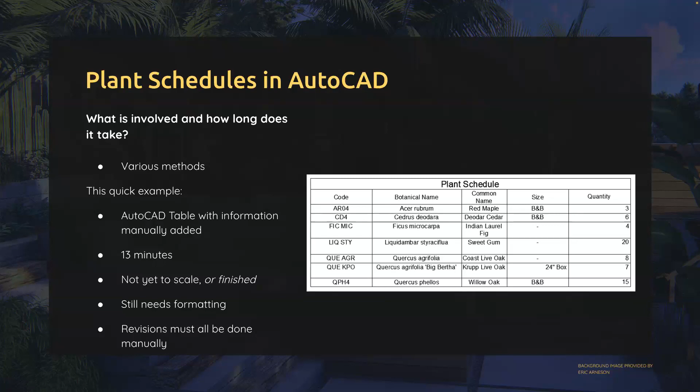So when working with LandFX, the schedule is just a few clicks away. It takes almost no time at all. This one here was using the same planting plan as the one I generated with AutoCAD, and it took about 5 seconds to generate. Now that 5 seconds includes the time that my hand left my watch when I set the timer to the mouse, the 3 clicks it took to place the schedule, and then my hand moving back from the mouse to my watch to stop the timer. So it probably took less time than that.

The benefits to this, though, besides the incredible time saving you get from generating the schedule, I can quickly reformat the style. With schedule options, I can change it very quickly. I can add or omit information with a few clicks. If I do make changes to my planting plan, which, as we know, changes are made very commonly, to update that, all you got to do is regenerate the schedule, which is also pretty instantaneous, and it's accurate. Super important that the schedule quantities and the information within it is going to align perfectly with what you want it to show.

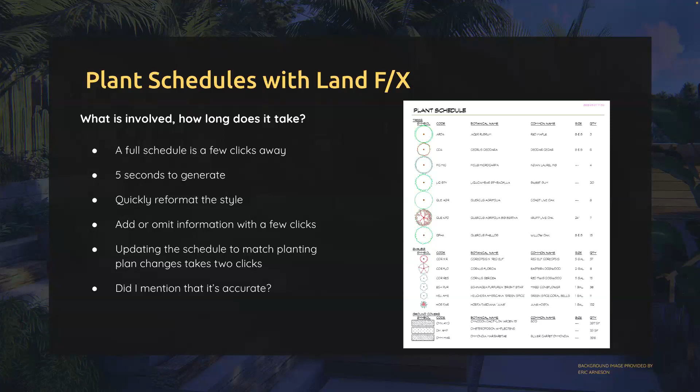So this slide isn't necessary, but is there a noticeable difference? And yeah, even if I was moving very fast and creating a very simple schedule in AutoCAD, it would have taken me at least 20 minutes. Now I know there's other methods to do this. Some people use Excel and paste the cells into AutoCAD from Excel, or you can do a lot of front end work where you create blocks with attributes that will allow CAD to kind of automatically add up certain items. But either way, it's a lot of work and time versus what comes with LandFX out of the box, which is about a 5-second schedule, no matter how complex your planting plan is.

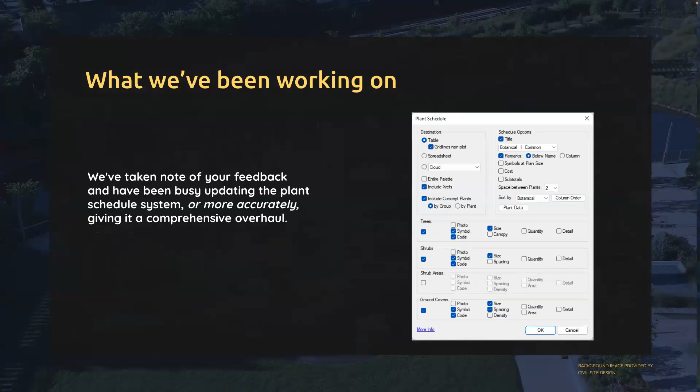So we have been taking note of all of your feedback over the years, and we've been busy updating the plant schedule system, or more accurately, giving it a comprehensive overhaul.

Some new features that I hope you're excited about: first off, we have a cleaner, more intuitive dialog box. Everybody loves dialog boxes, right?

Here's a really neat new feature: you now have the ability to reorder columns. If you click on this column order button, which I will show in a little bit, it'll bring you to this box where you can select columns and reorder them using the little arrows. And you get a nice little preview of what those columns will look like in their order.

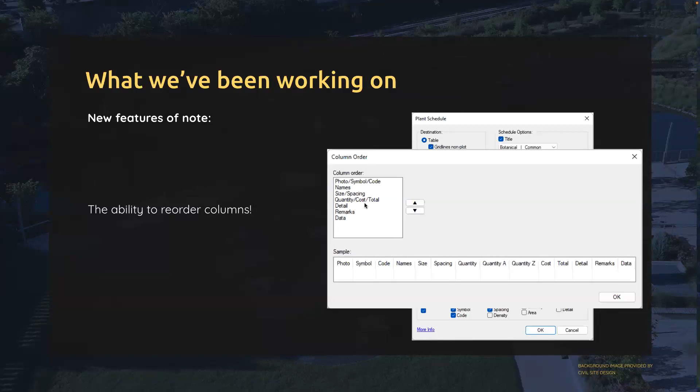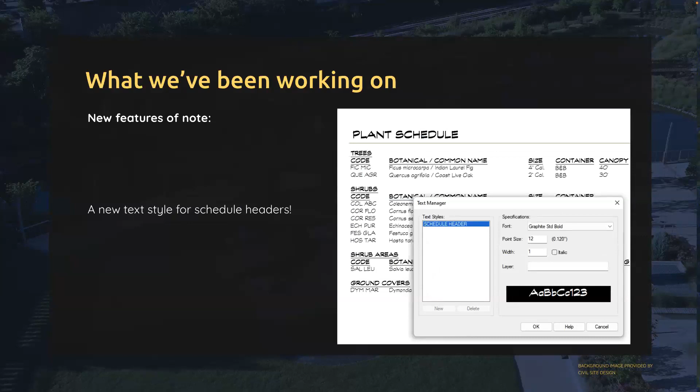We've also added a new text style for schedule headers — schedule headers being this text here. Previously, it just took on the schedule text style, and many of you wanted a separate text style for that, whether you wanted to make the text bold or a different font or what have you. So we've added that ability.

You can now include the canopy size for trees. Before, if you wanted to do that, you had to set up a custom user field. We got a lot of requests for including the canopy, which basically shows the tree size at its mature width in its own column.

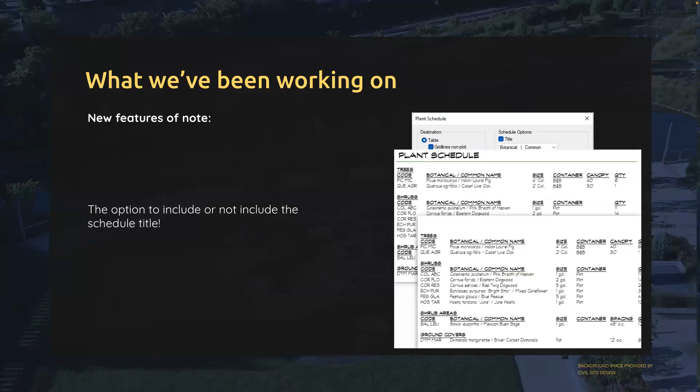We've also added the option to include or not include the schedule title. This can be useful if you're running different schedules by groups or maybe different work areas. You can run a schedule with the title up top and then run smaller schedules and place them right under it, and that title won't be there for those other schedules.

The plant group is now on a separate line from the header. Before, the tree group would have basically sat on top of where the code should have been. Now trees or shrubs or your plant groups have been moved up, so you now have a clearer schedule here because of that.

And here's a big one: whether you're running a schedule within a table that shows the cells, or what used to be called the drawing option, where you place a schedule without these cells, no matter how you place your schedule, they always go in as AutoCAD tables, which allows you to more easily adjust the widths of columns and the contents within, and also allows for better alignment of symbols.

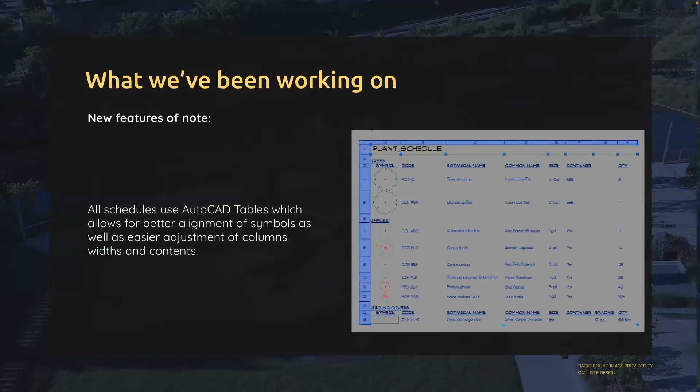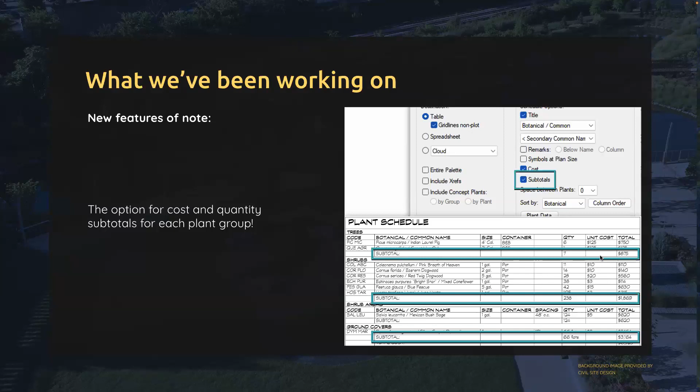Our previous plant schedule options had an option for space between plants, but it was basically a checkbox. Now you can adjust that space between plants between 1 and 5 spaces.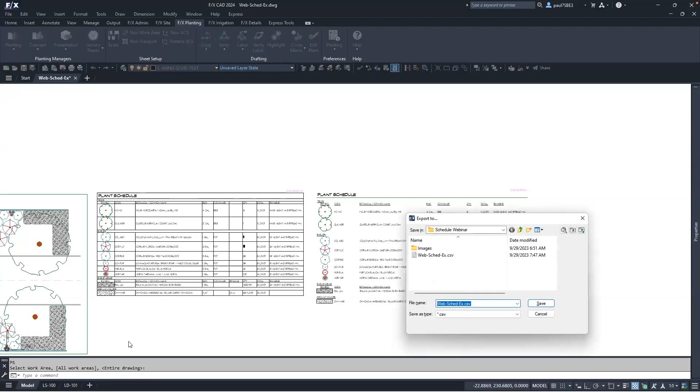I'm just going to save over one I've already created, and I can show you what that looks like. Now I don't have Excel, I have Numbers, but here is that schedule exported out to your spreadsheet.

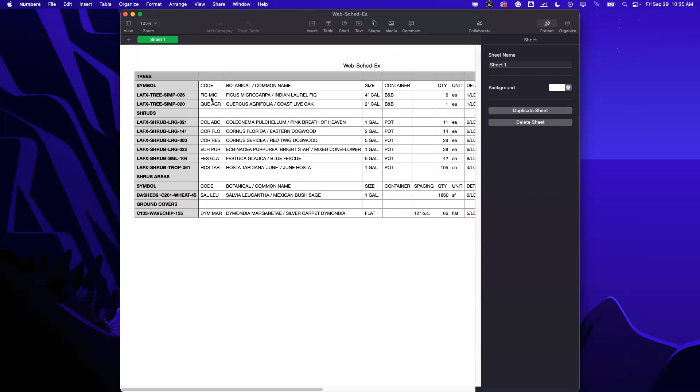Comes in looking really nice. Now I did choose to include symbols in this, so it's showing the name of the block that's used as a symbol, as you can't export blocks and have them show up as symbols in Excel, or the name of the hatch for those hatch areas.

All right, moving down. Whenever you press schedule and there's a schedule in the drawing, the system will know this and will ask you if you want to regenerate the schedule. So if you click yes, you can then click on one of the schedules, or if there's only one schedule available, it'll just update the one that's in there.

Which is great for when you have revisions and you've made changes to your planting plan, added plants, taken plants away, changed the data within the plant, etc. You just go ahead and click that, and the system will update it so that it's accurate.

Moving down in destination, if you are subscribed to Landscape Hub and you use their interface, you can choose this option. Eventually, when we have other partners that do similar items, that list will be here. You click OK, and it's actually going to send that over to your Landscape Hub so you can open that up and view your plant list there.

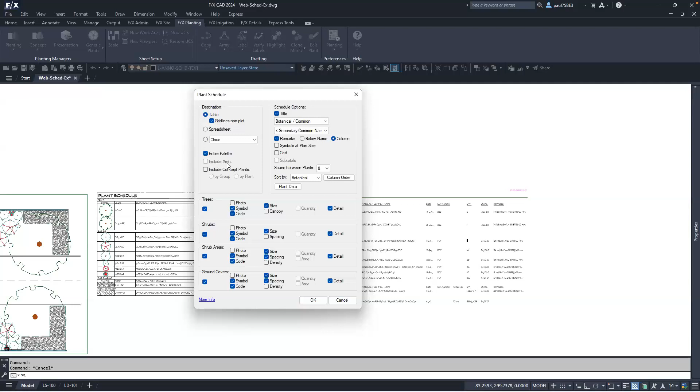But let's stay within CAD. Moving down, we have entire palette. This basically ignores the plants that are in your drawing and instead will give you a comprehensive list of everything that's in your plant manager.

Let's see what that looks like. Over here, this is just everything that I have in my plant manager. Obviously, there's no quantities here because it's ignoring the plants that are in the drawing. Let's clean up our space a little bit and move on.

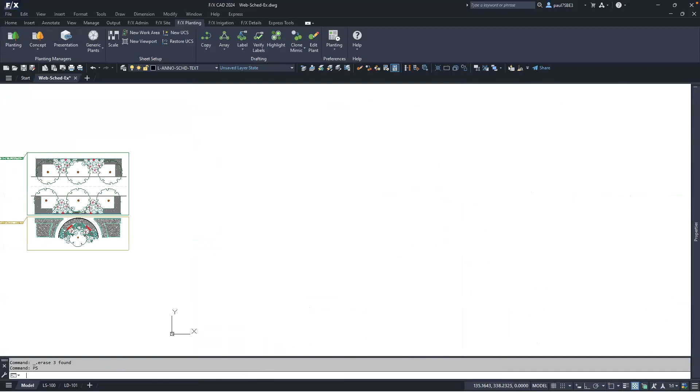So if I uncheck entire palette, it allows me to include Xrefs, as that's kind of superfluous if you're doing everything that's in the plant manager. But if you choose the option to include Xrefs, the system will look one level down into your Xrefs, and if it finds plants in your Xref, it'll include them in the schedule.

So if you follow our recommendation for sheet setup and you attach your planting plan as an Xref into your sheet file, but you want to run schedules in that sheet file, you can do so by choosing this option. I'm not working with an Xref right now because I was trying to keep everything simple, but if I had Xrefs and I chose that, the system would look through it and count plants in that as well.

So including concept plants, if you have concept plants in your drawing, you can click this and it'll actually include it into your main schedule. So I have that one ground cover mix placed. If I check this, it should place that in there.

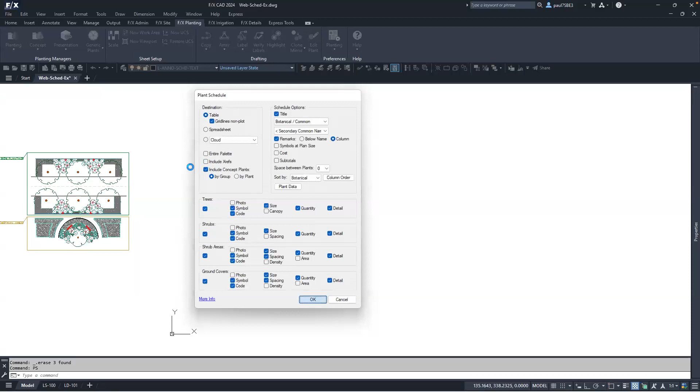Down here, and if you notice, I chose the option to include concept plants by group. So what it does is it actually separates this ground cover mix from the rest of the plants and displays what the mix is in the group with a little indicator here of what the concept group is.

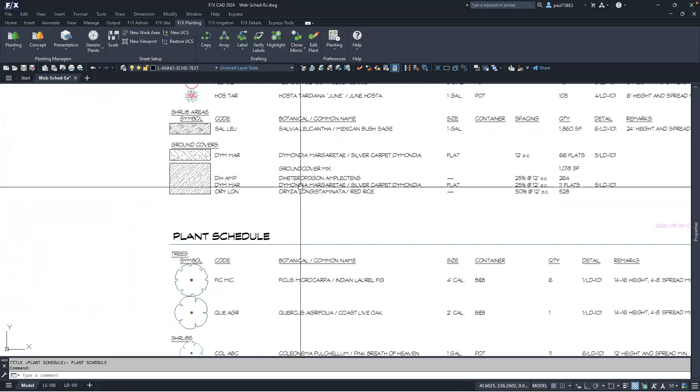If I choose to do it by plant, it's not going to separate it by its group and will actually merge it with the plants that are in your regular plants schedule. You see here, I have a single plant for this Dymondia ground cover, and I also have it included in my ground cover mix. When I run it by plant, it actually combines what's in the mix and what's in my just Dymondia areas, and it combines the quantities, as well as adding in the other plants from the group.

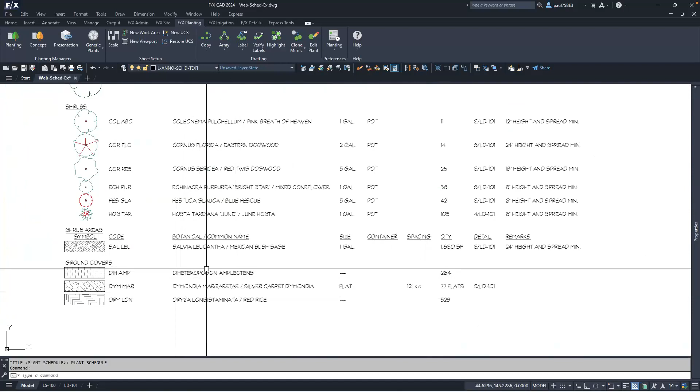So that's concept plants. Let's move over here before we go into plant groups. This title checkbox allows you to place the title on your schedule. So let's say I want to run a schedule for trees, and I want the title because it's going to be at the top. I can place that just like that.

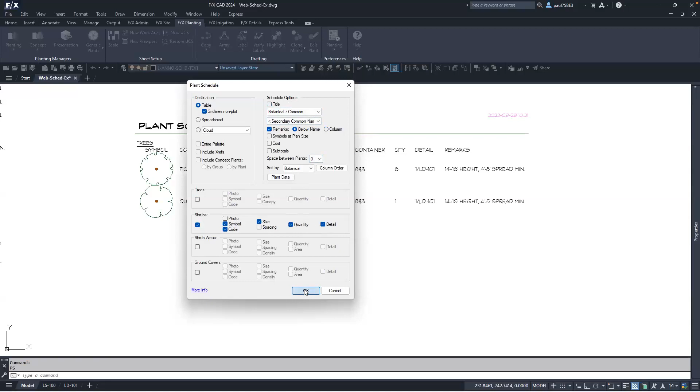And say I want to add shrubs, but for whatever reason I have different options for this, and I don't want the title because I want it to line up. Let's say for shrubs I want remarks below name. So I can click OK and place my shrub schedule. There's no title, so I can easily match it up with the tree schedule, and everything falls under that one title.

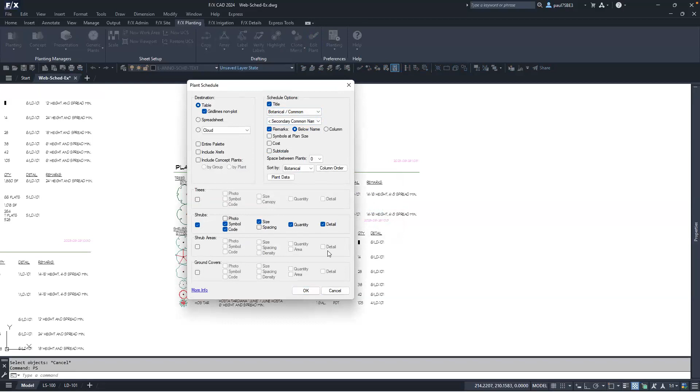So that's what title does. Under title, we have the botanical and common display, or the name display. As it sits, the botanical name and the common name will fall into one column. That's what this slash means, and that's what you see here. If I drop this down, I can switch the order so common comes first and botanical comes second. If I did that for a shrub schedule, it would look like this.

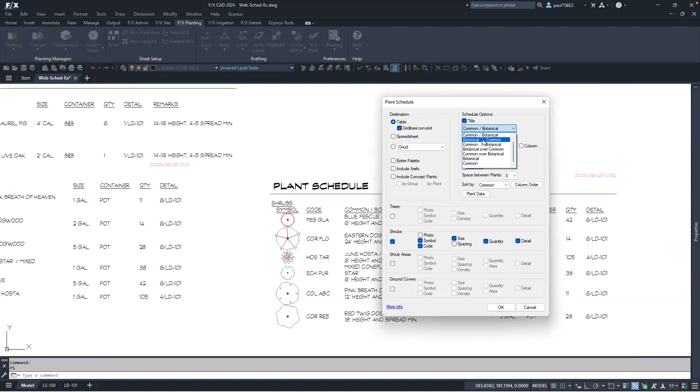Or I can separate the botanical and common name into two separate columns. That's what this straight line means. So if I want botanical in one column and common in another column, I just choose that option and place a schedule. Now we clearly have the botanical name in one column and the common name in another. And the remarks is below the name—that is a separate item.

In addition to separating the columns between botanical and common, you can also do botanical over common, which keeps it in the same column but places the botanical name on top of the common name, like this. You can swap the common and botanical name, or just choose botanical or just choose common. I think you get it.

Moving on, we have secondary common names. So if you're working in a different country and you want to use those common names, you can choose, say, Chinese, and place a schedule and have those characters show up as the common name.

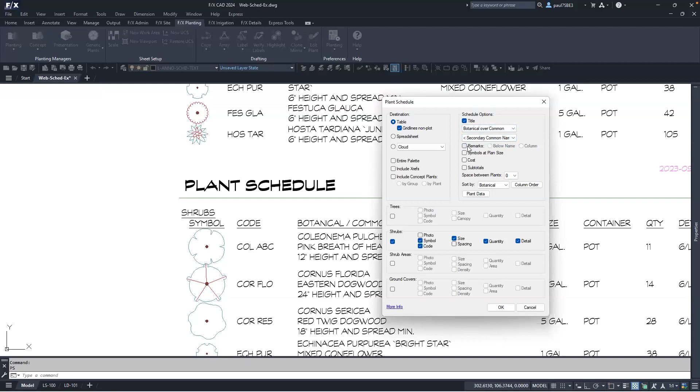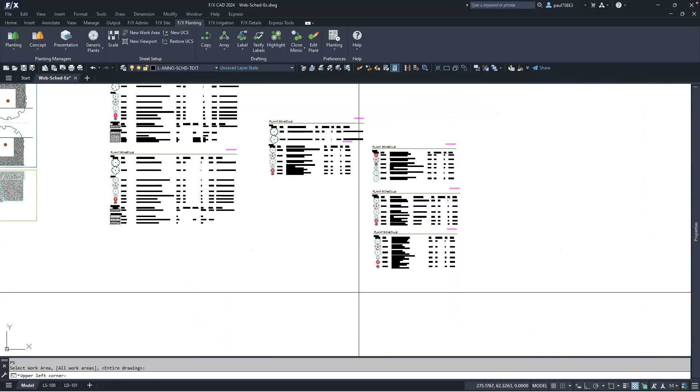The remarks are something you can include or not by checking or unchecking it. If you choose below name, you'll get what we got down here, where the remarks—this 12-inch height and spread minimum note—actually falls underneath the name. But if I choose column, it'll show up in a separate column. Right now it's set to show up at the end, but that is something we can change.

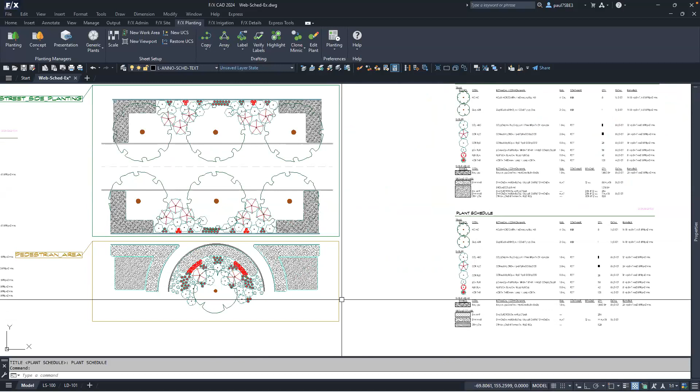Symbols at plan size basically show your plant symbols as they appear in the planting plan. For comparison, let's go over here. So all of these symbols show up at the exact same size as they are in the plan, whereas before they're all more uniform and not perfectly sized to match what is actually in the planting plan.

Below symbols at plan size, we have the cost, which allows you to include the cost of your plants if you've entered a cost value in the plant data, and subtotals, which is new. So I'm just going to check both of those and show you what that looks like. Let's run a schedule without symbols and with grid lines, because I think it looks neater when you're doing cost related items.

So now you have the unit cost—that's what each of these plants costs per unit. This Dymondia is done in flats, but it's still the cost per plant. You've got a total column here, which adds up the quantity times the unit cost, and we also have a subtotal down here at the bottom. The quantity is subtotaled up—this 238 is just all the plants in the shrubs group, and in the total column it's just all the costs of the shrubs right down here. Then you go down to the bottom and it'll add up the total cost of your planting plan.

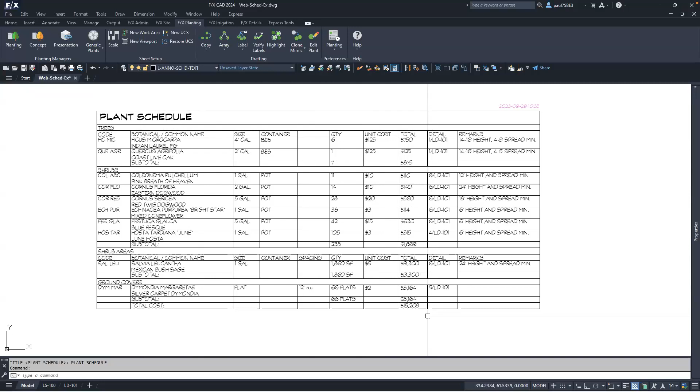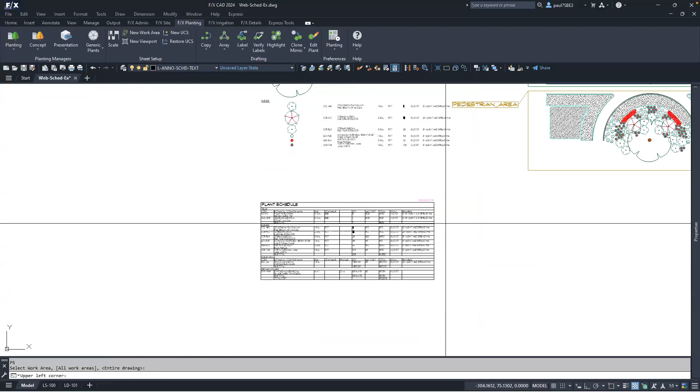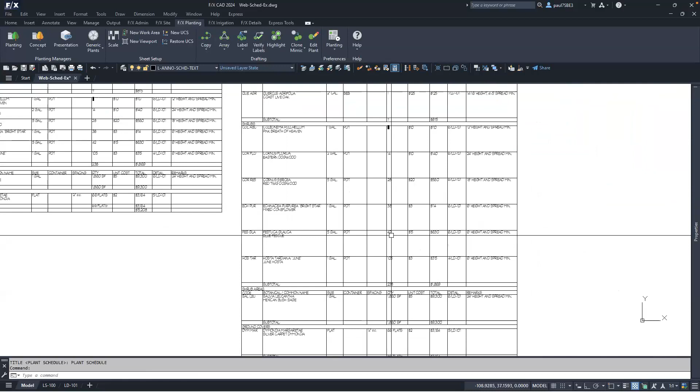Moving on down here, we've got space between plants. Everything I've been running so far is set to 0 space. If we set 1 space, you can see what that looks like—it's basically just adding a space here in the plant name. You can adjust this, so if you want 5 spaces between your plants, you can do so, and it would look like this. That one's nice if you want to write down some notes on them. I always, when people asked for that one, I was like, that's a great idea, and it's such a simple option. So that was a fun one to add in.

Did you mute yourself, Paul? Yeah, well, no, I'm just...

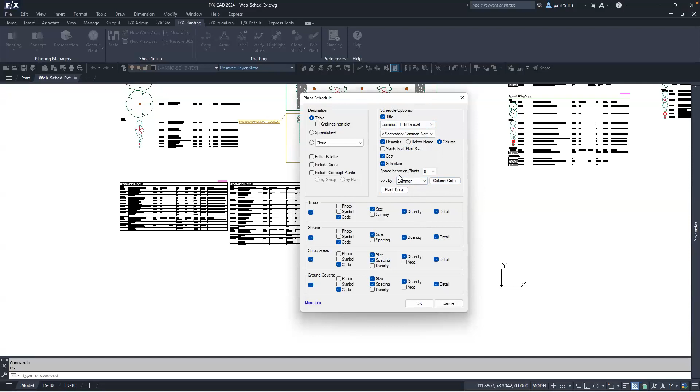I was just thinking about showing the sort by. Moving on down the list, we have the sort by dropdown. The plants are sorted alphabetically, but you can set whether that's by botanical name, common name, or code. I think only if I use common name would it look different, because the codes all have the same first letter as the botanical names. So if for some reason you want to use the common name to organize it, you'll see that it's now been reordered based on that common name.

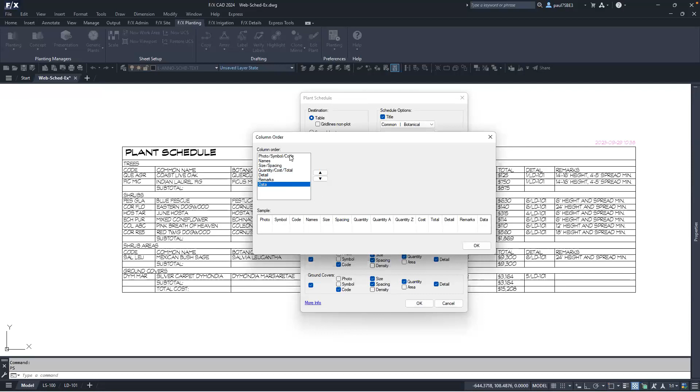Probably my favorite of the new features, or at least one of them, is this column order. If you click on this, it'll pull open this window. You've got your photo, symbol, and code, which, as far as we can tell, should always be grouped together, and then names, size, spacing, quantity, cost, total, detail, remarks, and data. You can reorganize these as you see fit, with the exception that this top one has to go first.

Let's say I want my detail at the end, my remarks right after names, and my totals up front, because I'm a silly person. Click OK, place a schedule. And the columns have been reorganized to my liking. Very neat feature.

We can leave it for now. Moving on down, we've got your plant data, which if you click on that, allows you to select different plant data tags to be included in the schedule. I'll show you both, but if you choose the grouped option, I think it's a better look. It'll actually list out the bits of data in columns, and I think it's super readable.

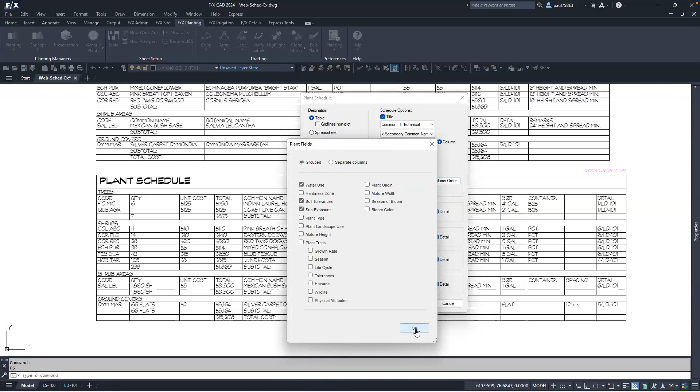Let's say I want to display water use, soil tolerances, sun exposure. Click OK. Click OK. Place a schedule. And those data marks show up right here. So water use for this plant is medium, it's got the soil tolerances nicely listed out, and the sun exposure requirements of that plant.

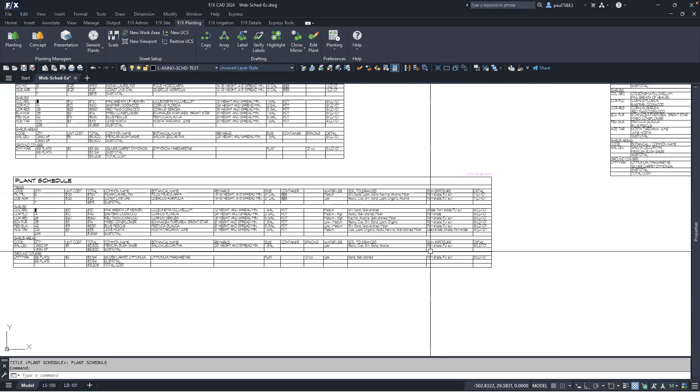All of this data is coming from our plant specialist who makes sure that it's accurate. And if you want to see what that is, you can go to edit your plant and click on this data button here, and it'll open up the data behind it and show you what it has been tagged with.

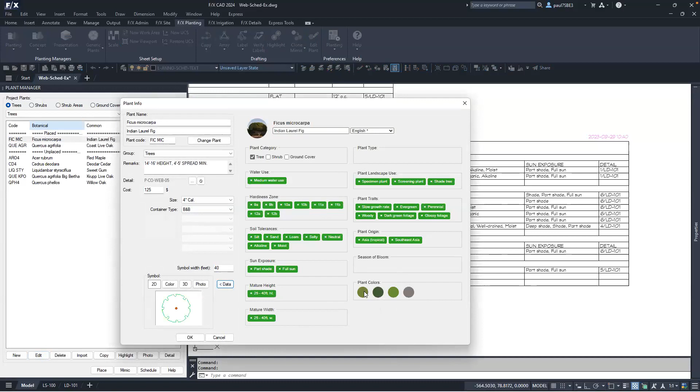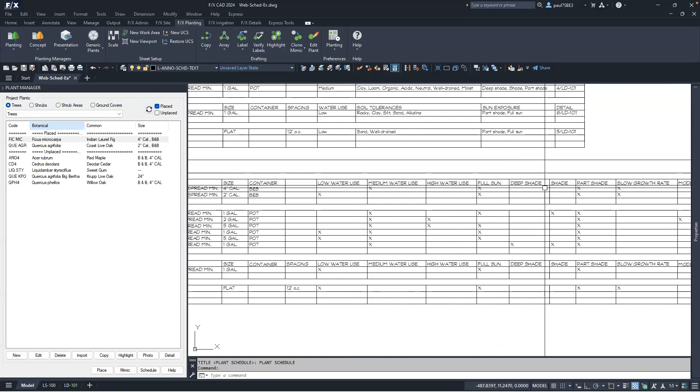So if you want to do the plant data by separate columns, I can show you what that looks like. Right here. You're going to get a very long column, but it's going to list out all of those different data points in separate columns and simply put an X as a marker to let you know which applies to which plant.

Okay, make sure none of those are selected. We can move into plant groups. How are we doing on time? Okay, so you probably saw me already adjusting some of these. I think it's pretty intuitive, but basically the check box, if it's checked, it means that it's going to apply to the schedule. If it's not checked, it's not going to show.

So you can choose to run schedules by group. If I just want to do shrubs, I can do that by just selecting shrubs, or shrubs and trees, just check those two. If I want to include the symbol as well, I can check that. The code, I can uncheck and check. So with these options, this is what it looks like.

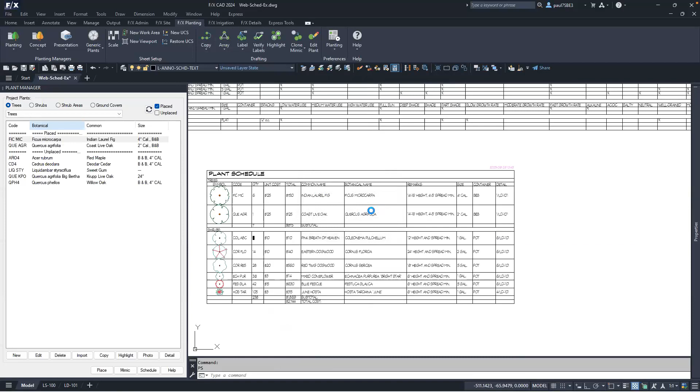Let's see what it looks like for the sake of time with everything checked. One thing to note is if you're doing area in your shrub areas or ground covers, you're not going to get quantity, it's going to show you the square foot or meters squared or whatever the area is. Select tree canopy to get that column. And you can add spacing to your shrubs, which will basically just be the width of the actual shrub, assuming the shrubs are placed touching, so it's the two radiuses together.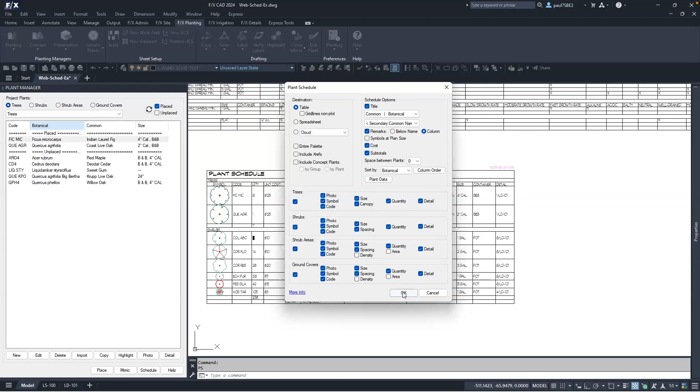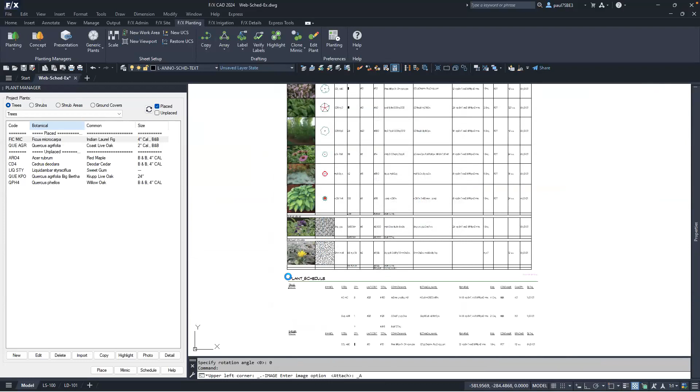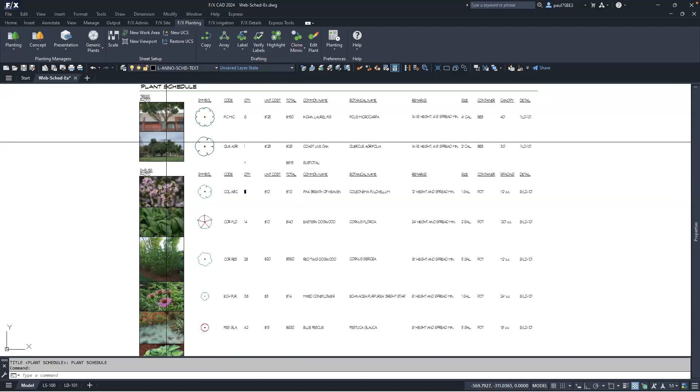Anyways, you can choose that as well. Or if you choose density for your areas, it's not going to allow for spacing, so it's one or the other. But this is what it looks like with all of the options checked, including photo, which I think looks better with no grid lines. So that's what it looks like to run a schedule with just about all the options except for the plant data selected, including photos, which is a nifty new feature. And of course, down here, instead of plant symbols, you have a display of the hatch for referencing the plan and all the information you want to add.

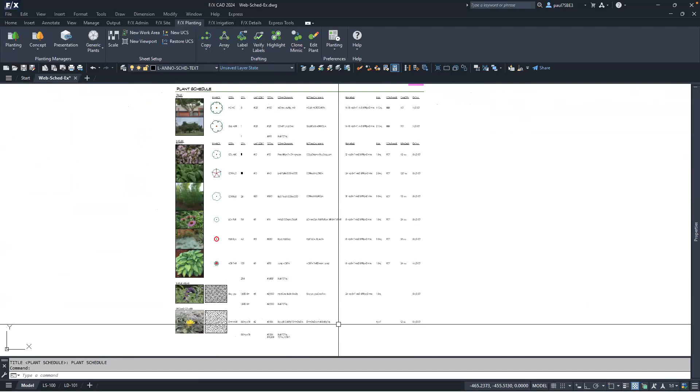So let's move on to concept plant schedules, alias CPS. Here is the new concept plant schedule dialog box. Pretty much the same info as before, but a nicer, more compact dialog box. You once again have the option to send to the drawing or to a spreadsheet.

You can display the entire palette, which is everything in your concept plant manager instead of what's in the plan. You can include the title, cost, and choose whether you want the symbol or the photo or both or neither. You can also choose whether or not to display the plants in the group palette and how that's displayed, whether it's showing botanical/common in a single column, or botanical, or just common, and you can choose to include remarks, size, and fill spacing.

So that's what that looks like right now. If we compare it to the previous version, you should be able to see that it's different.

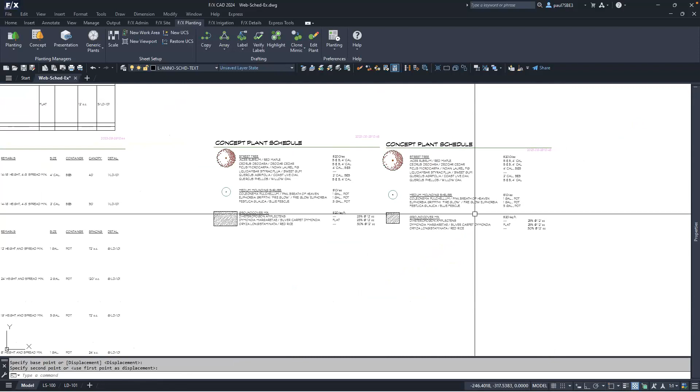I don't know if you've noticed, but when I'm placing these schedules, the insertion point has changed, which is a nice feature, I think. Before, when you were placing a schedule, the insertion point would actually be the end of this line, so the plant schedule title would actually be above where you're inserting it, which usually meant you had to move the plant schedule after you placed it. Now the insertion point is the actual upper left-hand corner of the plant schedule.

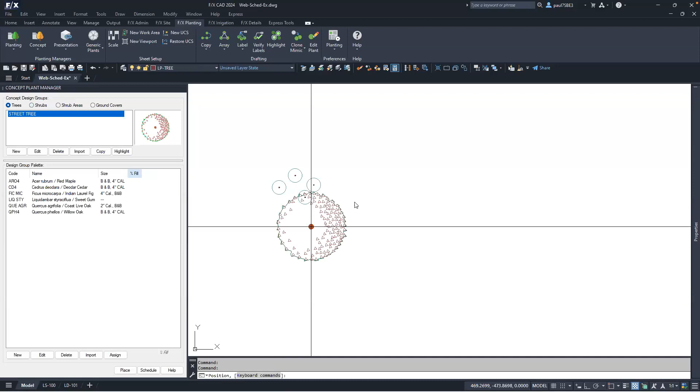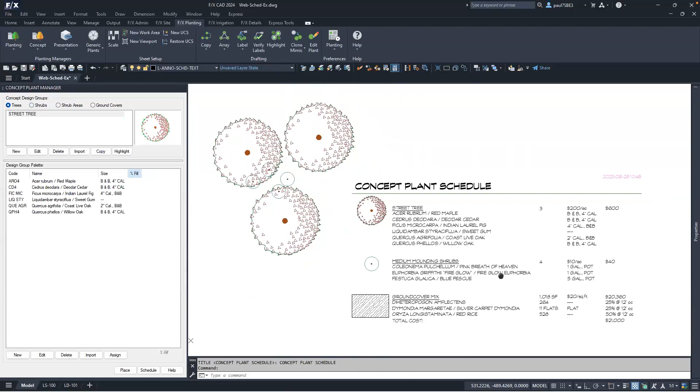So I'm just going to place a couple of my concept plants, just kind of willy-nilly, and show you what the new concept plant schedule looks like when it's not the entire palette. I'm going to include quantity and all the information. Click OK, press enter, and there we go.

I believe if you compare this one to the old plant schedule, you should see the compaction a little bit better. Yeah, there we go. So old schedule, a little more spread out, takes up more room. New schedule, a little more compact, a better idea of what the hatch is.

Very nice. This also has the schedule headers, which is this text here, a separate text style. I can show that real quick. To change the header text style for the headers, it's the same process as for the schedule title or for the schedule text. You want to go to your general preferences, which is up in F/X Admin.

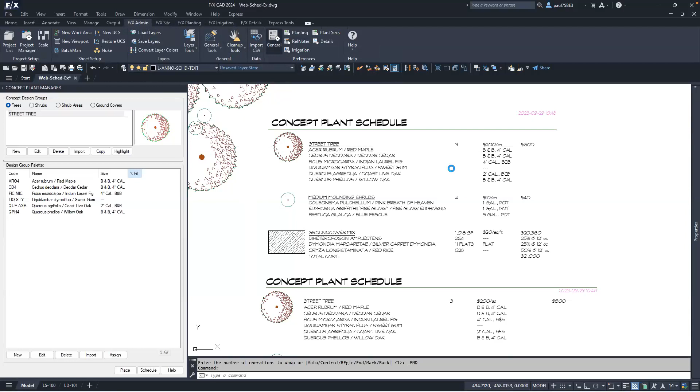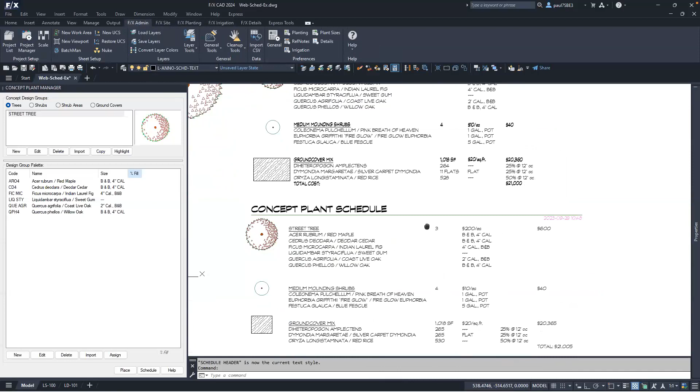You should see a new entry for schedule headers. So if I edit this, I can change my font to maybe I want narrow bold for headers, click OK. Now you can see a pretty big difference between the old schedule and the new schedule. I believe you can now see that in these here. So now I have a new text style for these headers, which is pretty nice.

And before I get to questions, because I'm sure there's going to be a lot, I'm going to show off the Bloom schedule.

So here's what the Bloom schedule dialog looks like. Once again, you can choose to have the grid lines as non-plot or plotted. You can send it to a spreadsheet. You have the option for entire palette. You can include Xrefs, but I just want a basic code of the plant's name and the bloom times.

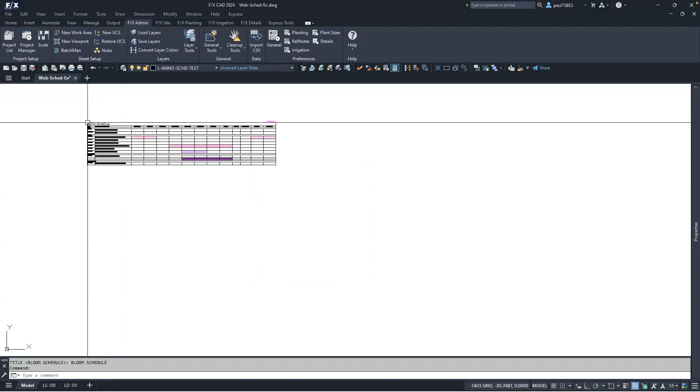So here's my bloom schedule. One thing to note about this is that there are a lot of flowers out there that are white. So if you're going to be printing this on paper or looking at it like I am on a white background in CAD, you can place a solid hatch behind it of a different color.

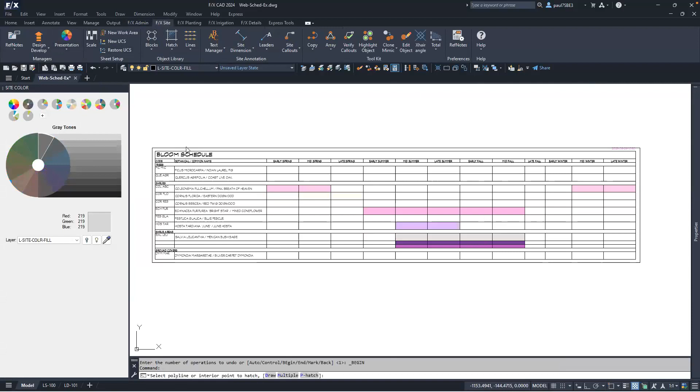So I'm just creating a rectangle, and I'm going to use site color, which is the command site color, or you can go to this FX site ribbon and choose site color. That pulls open our site color tool. I'm just going to throw a nice light gray on this rectangle. That way I can easily see the time of year where this eastern or red twig dogwood would be blooming with white flowers.

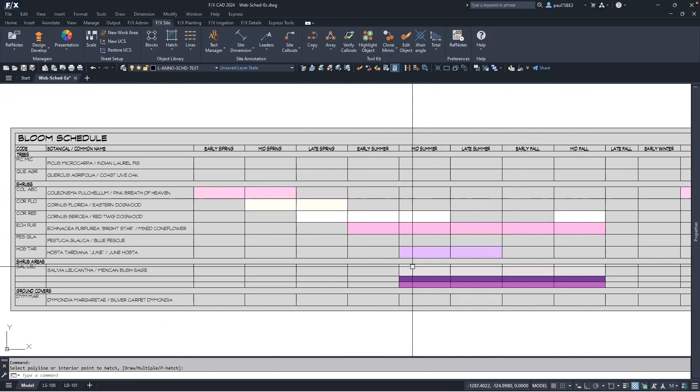When doing this, you may notice that some plants have more than one color. That's because not all flowers are just one color, so we try to show the whole gamut of colors that come with their bloom, and so you might see multiple colors for a single plant.

Let's just place another one with some different options. So if I did grid lines non-plot and I included a photo and the symbol, here's what that would look like.

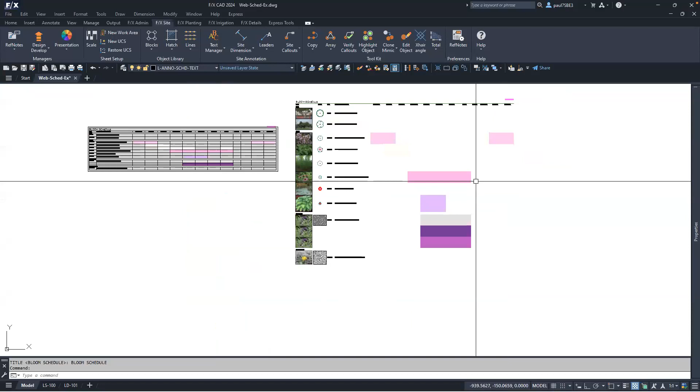So obviously the photos are going to make your rows taller, and so the color preview here is going to be a little wider or taller as well. Oh look, it's repeating the photo for the accent colors. I'm going to write that down. Yeah, I didn't know if that was a feature or something that's a bug.

Yeah, these are all still in beta. We're still testing, and no errors throughout this whole show. So that's great. We've come a long way in a couple days.

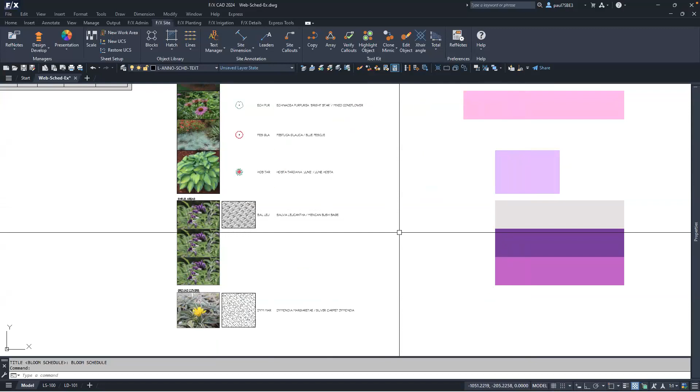But yeah, so it looks like we're gonna have one photo here for that. Yeah, I don't think attendees appreciate it. It was a long night last night.

So that's bloom schedule.

Before we jump into the end here, I'm going to stay in CAD and try to answer questions if there are any. There are a lot of questions.

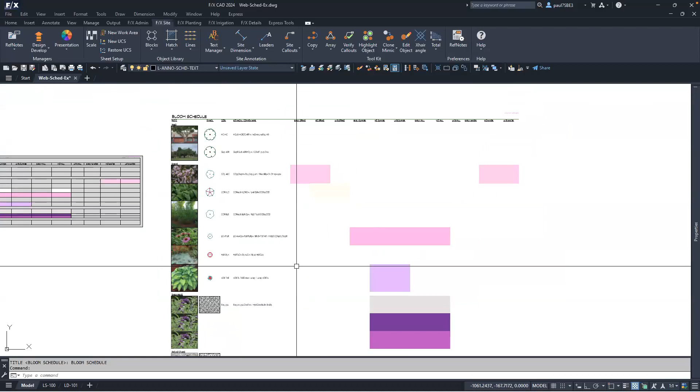Figured there would be. Not one person asked what these amazing fonts are that you're using, so I lose that bet. Paul has been showing off our new fonts - that's the Adobe Graphite font. We just wrapped up a licensing agreement for that, and we'll be distributing the Graphite font family with Land F/X. So if you like that font, it's coming. Yeah, there you are, the whole entire Graphite family. But I lost the bet - I was like, someone's gonna notice. No one noticed, darn it.

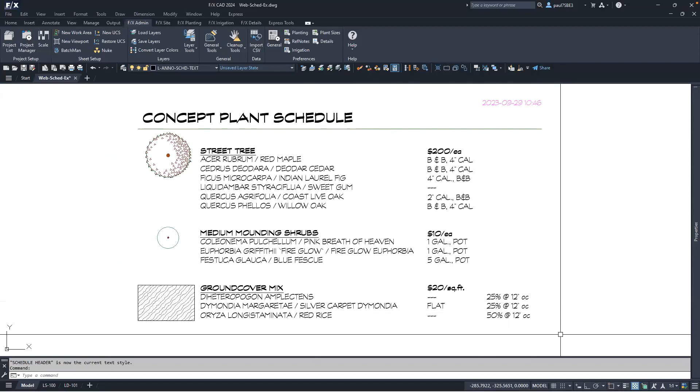Yeah, so many questions, let's see. A couple people asking about biodiversity, but when the question is just the word biodiversity, I don't know what that means, I'm sorry. But for the bloom schedule, people want to be able to adjust the bloom times, or have it automatically adjusted by your climate zone or something. Very interesting, we'll keep that in mind.

As you can see, that's how we've been tagging them, just by the name of the season. So of course that also works for our Southern Hemisphere people. This is also obviously new, and this is great feedback.

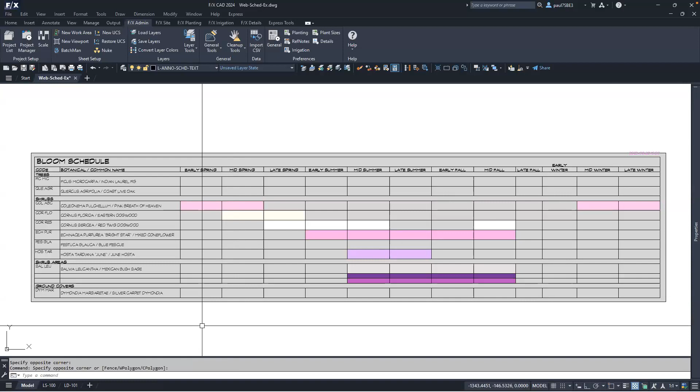Multiple people have been asking, can I rename the schedule or rename the columns? You can rename any schedule just by double clicking on it, because that is the one and only attribute, the title of the schedule. So you can just double click any schedule and rename it. But if you want to rename the default for the schedule or for any of those column titles, that's all in preferences under language strings. So you are welcome to change plant schedule to plant legend, for instance, if you wish. You can see those are all the strings used throughout the software.

Let me give you a minute here to look through and find some other questions here.

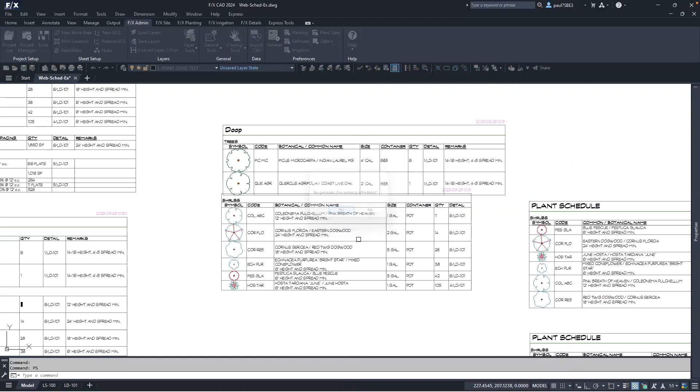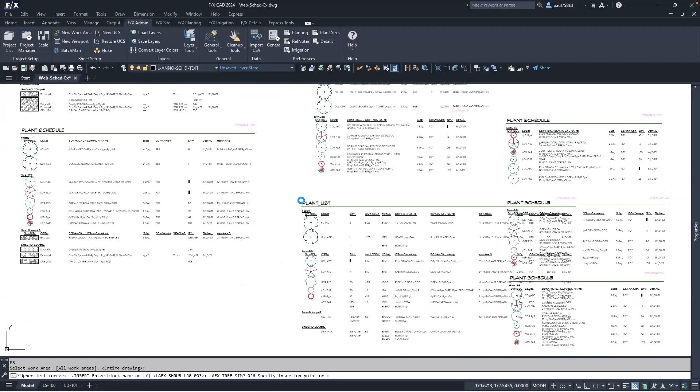We did get a great question on, your only options to regenerate or make a new schedule, and someone said it would be neat to be able to edit an existing schedule. We were actually just talking about how to do that - we were working on that literally this week. Obviously it's not in place yet, but that is now scheduled to be able to regenerate, create a new, or edit an existing schedule. So that is on the plan.

Oh my gosh, just so many questions. Someone else asked, is it possible to use regular apostrophes instead of backticks? That has been addressed a number of months ago. So yes, you can now use apostrophes in a plant name, and they will come in that way.

Yeah, I'll see if there's any more. You have any other good thoughts, Paul?

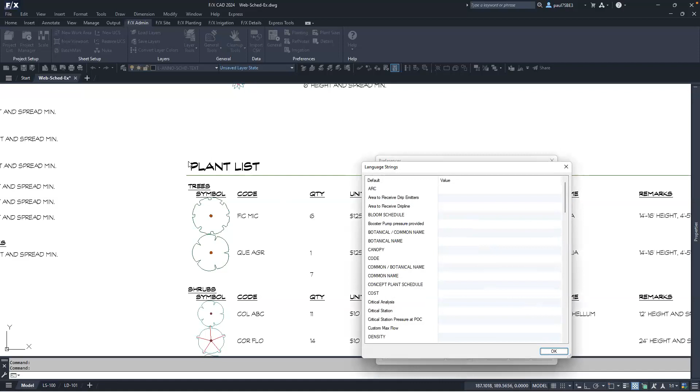I'm glad someone brought up the schedule title because that was something I meant to show - the schedule title and these various headings and whatnot. If you go into your general preferences into language strings, watch what I was doing, I just did that for plant schedule, I changed that to plant list. You just got to find that text you want to change and put the value in here. Then the next time you run a schedule, it'll have that new title.

Also in preferences, all the schedules that I've run have been in uppercase, but the data for my plants is not all uppercase. That's because this option was checked, schedules uppercase. So if I uncheck that and run a new schedule, you can get that mixed cap, the lowercase and uppercase.

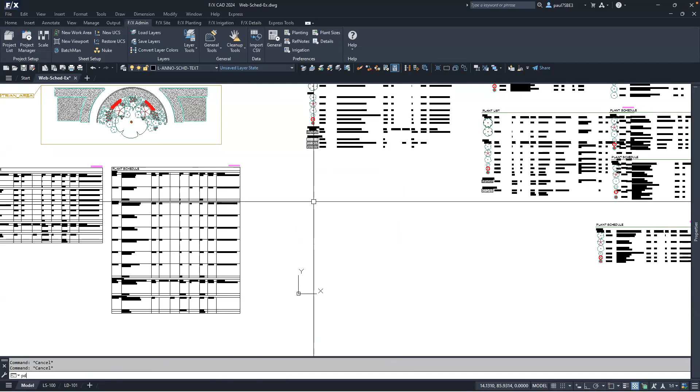We got a number of people asking, oh, they'd love a checkbox for native. There's a couple ways you can do that, depending on how you want it to appear. You can either add that to the plant user fields, 26 plant user fields in preferences, or you can also add it into your plant data fields, wherever you prefer to have that. So you can add that.

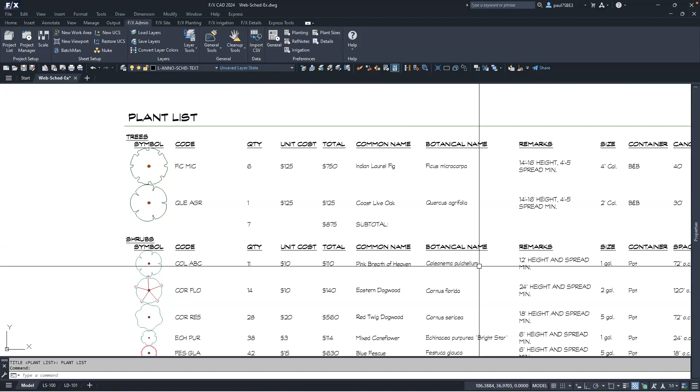And of course, Paul, we do have a number of people asking how they can access this amazing thing. Is it maybe time to show them the secret command? Yeah, people want to reset or regen all their schedules. No, there's no reason to do that. I'll just chug.

What do you mean, just chug? You mean like to see how long it takes or something? Yeah, they wanted to see it'll chug for 30 seconds. Let's just show them how they can make them on their own. Sorry guys, I tried. Nice try, Jake.

I have the commands listed on the last slide of the show, so you can read that, but I'll just tell you what they are. For you to access the plant schedule, you just need to type in plant schedule underscore new.

That'll take you to the new schedule dialog box where you can place that. For concept schedules, it's concept plant schedule underscore new.

A thing to note, when you do that, it's going to change your user profile, meaning you'll also get the new concept plant label, which has been updated so that the label quantities and the concept plant schedule quantities are accurate and consistent with each other. There was an issue where sometimes the schedule was 1 or 2 plants off, depending on your areas. That's been fixed, so if you use this new concept plant schedule new command, you'll get that new label as well, and it'll be saved into the drawing file if you save it. Any new drawing, as soon as you run that command, will give you that new label style — or not really a new style, but a new feature of more accurate counting.

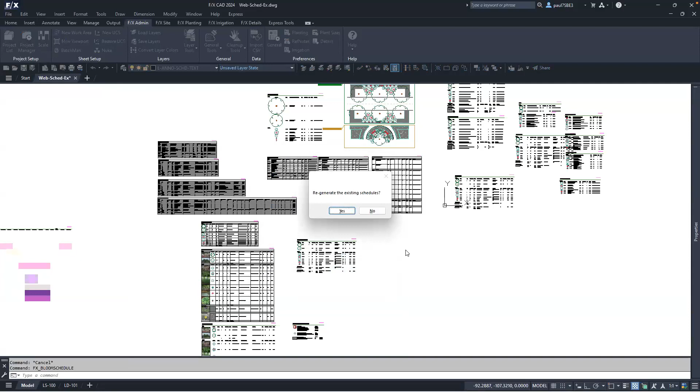Before we depart, I wanted to touch on a couple of things. These new plant schedules are still being developed and tested — consider them in beta mode right now. That's why we haven't swapped the buttons for the regular schedules yet; we're still actively testing these things. If you use these new schedule features and come across issues or bugs, please let us know. It'd be a lot better if we learn those things before we officially release it so we can have it all fixed.

There are a couple of things we've gotten requests for that we're still considering. Column widths and being able to set those has been a big requested item. What we need from you, if you want us to address this, is examples of what you're coming up against that requires this. Right now we're having a hard time justifying it with what's there, so if you can send examples and really argue the point as to why it's necessary, we can consider it further. Same goes for the quantity of plants being center justified within the quantity column. We've pushed it to the side and won't implement it unless we get feedback from you — there's got to be a rationale behind it, and as of right now we just don't see the reason for it.